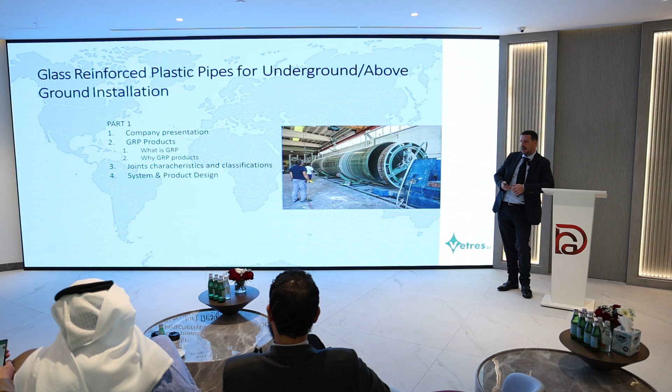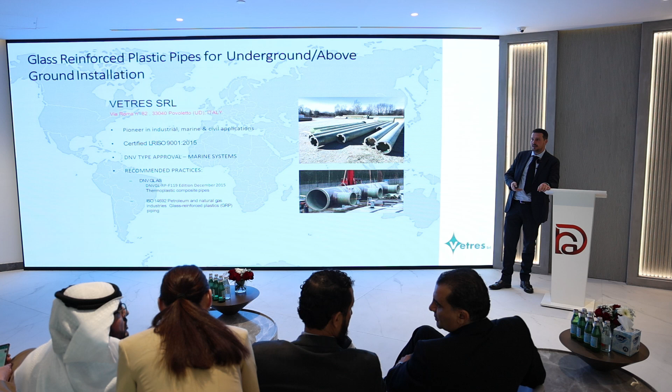We supply in the Middle East a lot of our materials, especially also with Dream Gulf. We supply to Metito. We have orders ongoing with Metito for desalination plants. We made with them the Burullus plant with Orascom.

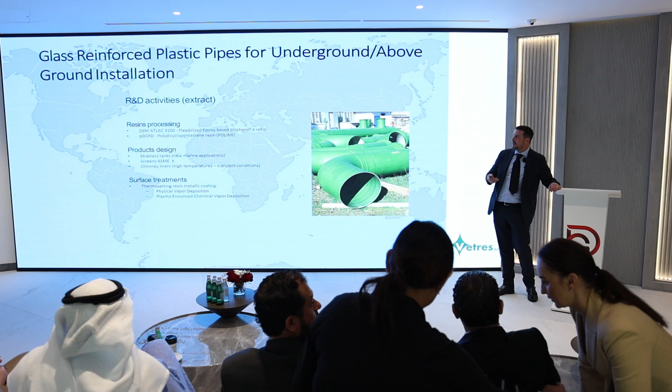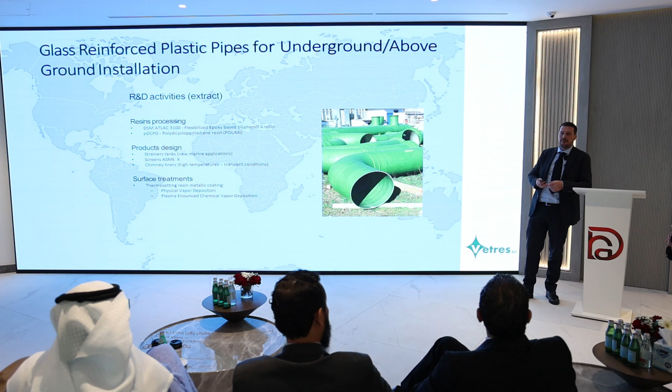We use different types of resin, depending on the request of the customer based on the liquid that goes through the pipes or the tank. So we can use resin for water, like isophthalic resin, or resin for chemicals, which is vinyl ester resin, and we can also use epoxy resin, which is more common in the Middle East.

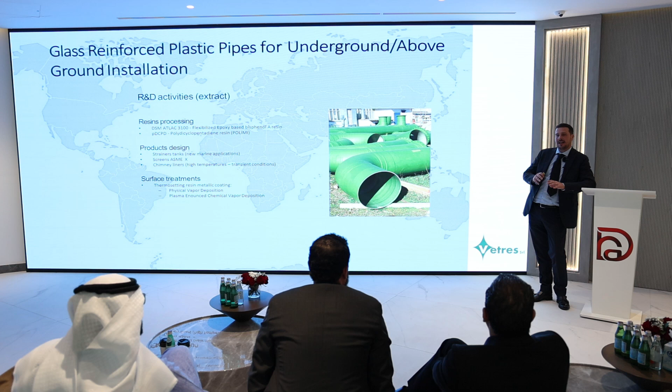We have everything inside our company, so the design is made by us inside the company. We have degree engineers who can develop the requests of customers, as with GRP, a lot of engineering companies, also big contractors, do not have much experience or knowledge of this kind of material.

So big companies were asking also for GRP companies who can help them with engineering. Sometimes we also hold workshops inside the big customer's facility to understand how to use GRP or where to use GRP.

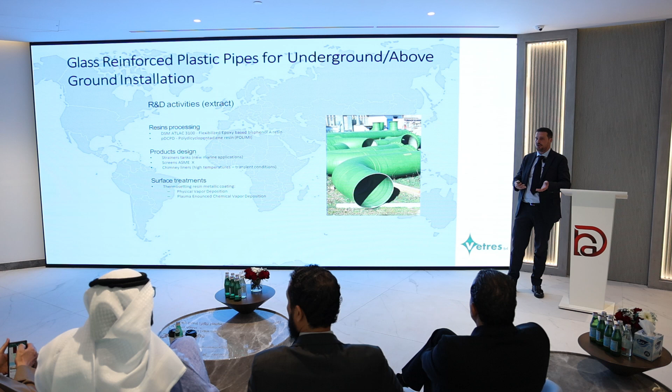This is the kind of product that we can supply. Our must is the bell and spigot joints.

With the bell and spigot joints, manpower specialized to make welding is not needed, because it's just a matter of inserting a male into a female with a double O-ring and a K-lock. Usually with GRP, the worst thing, let me say, is the welding on site, because you need specialized manpower.

Maybe you need to move chemicals from our factory to the other part of the works. But in this case, we solve this situation with these joints, which are mechanical joints. It's just a matter of inserting a male into a female, so it's a much easier and quicker thing.

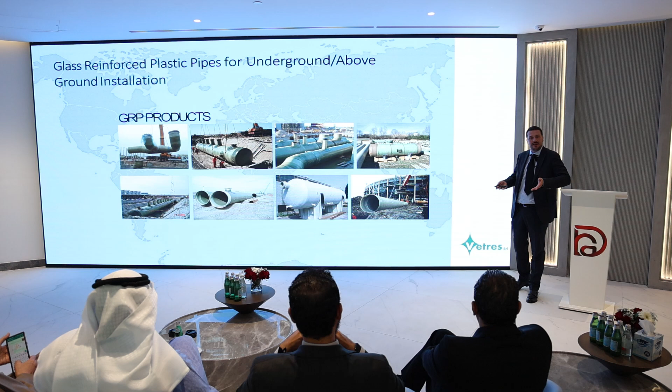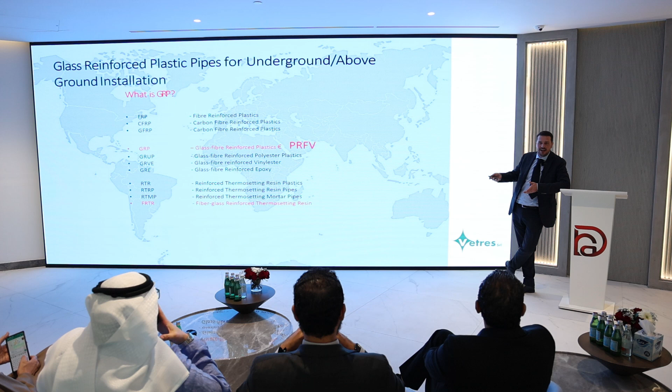GRP can have a lot of names and acronyms, but at the end it's the same material. Usually in North Europe it's called FRP, fiber reinforced plastic. Usually in the Middle East it's called GRP or GRE, but at the end it's the same product.

GRP is a composite material that can reach today mid to high temperatures, because before, GRP was used just for ambient temperature or a maximum of 60, 70, 80 degrees. Now with new resins on the market, we can reach also up to 140 degrees.

The most important thing is the HDT of the resin, which means the heat distortion temperature of the resin. Now on the market there are resins with an HDT of 180 degrees, so that means we can reach 140 with this kind of resin.

Usually the most common resins used are vinyl ester, epoxy, and isophthalic resin, as I mentioned before. Isophthalic resin is suitable up to 50-60 degrees. Vinyl ester resin is suitable up to 80-90 degrees. And then there is epoxy Novolac resin that can resist up to 140 degrees.

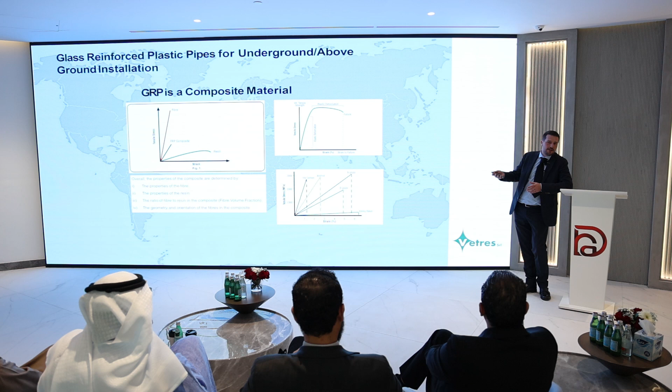Also, now GRP with glass reaches very good mechanical properties, because now between GRP and carbon steel, the difference in mechanical properties is not so large. We are very close to carbon steel, to metallic materials, let me say.

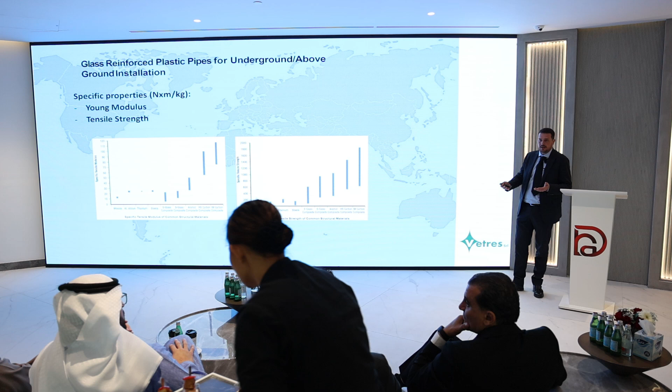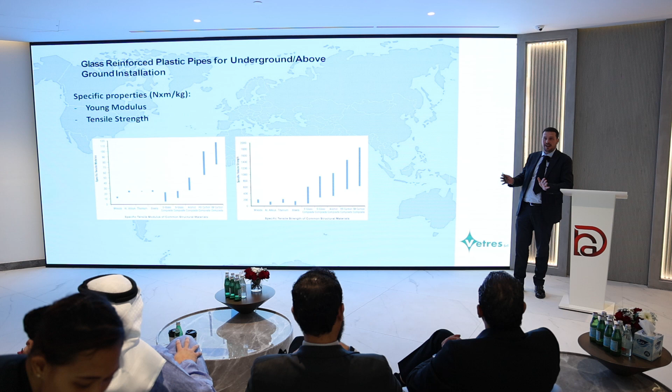Also, the advantage of GRP is the weight, because the weight of GRP is a quarter of carbon steel. So we can give our customers the possibility to save a lot of money in terms of lifting equipment on site, because you don't need big cranes or big lifting equipment, as the material is not so heavy. But you can maintain the same characteristics as carbon steel without losing any mechanical properties.

The GRP products are the best solution for corrosion allowance, because you don't need extra thickness on the GRP for corrosion. In metallic materials, before the pressure, you have to choose the thickness for the corrosion allowance. On the GRP this is not needed, because if the GRP resists, there will be no corrosion in this kind of material. Also, the GRP does not suffer cathodic underground issues, so cathodic protection with GRP is not needed.

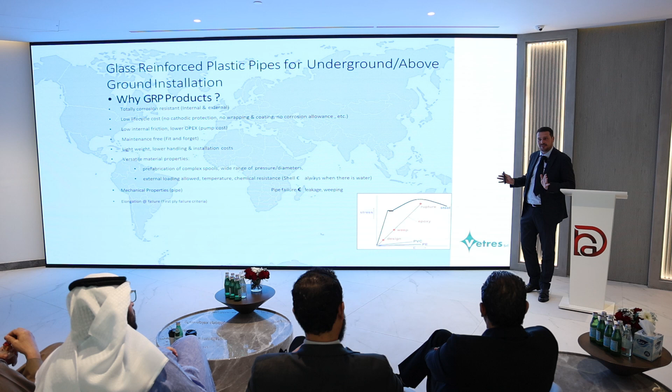So all this advantage with this material can be, at the end, if you give a look at 360 degrees, an advantage in terms of money and efficiency, because GRP is designed to resist 40 years. If you install the GRP in a proper way, as the DEP of Shell, our most important norm to produce the GRP, sets that if the company designs, constructs, and supervises the installation, the GRP can resist 40 years, and you can forget about this material underground or above ground.

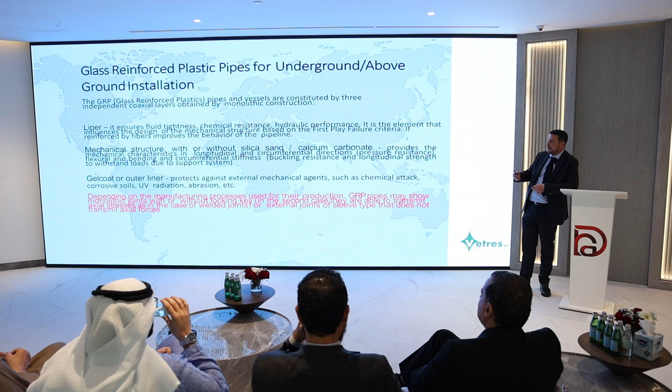The GRP pipes or storage tanks are built in three layers, let me say. There is the liner, that is the corrosion barrier. Then there is the mechanical structure and the external liner to protect against UV radiation, abrasion, and chemical attacks for the above ground application.

As I told you before, our must is the bell and spigot joints, as no manpower specialized in GRP welding is needed. But there are also other types of jointing; usually the bell and spigot is for underground and for very long line applications. For the heart of the plant or for above ground application, there are also the butt and wrap welding or the conical gluing joints. These need specialized manpower who know how to do it, otherwise it will be a mess.

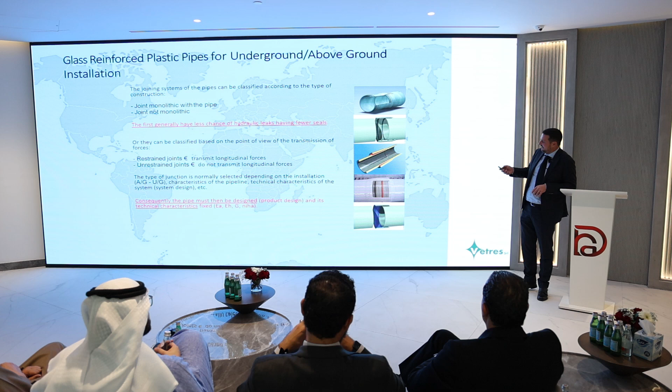Okay, so the GRP can be designed on specific request of the customer, customized on specific customer request. What we need to design the GRP properly for the application that the customer needs is to have at least some information, like the DN, the pressure class, if it is above ground or underground, the jointing system, the fluid to choose the correct resin, and the design temperature. These are, let me say, the minimum data that we need to design the materials in a proper way.

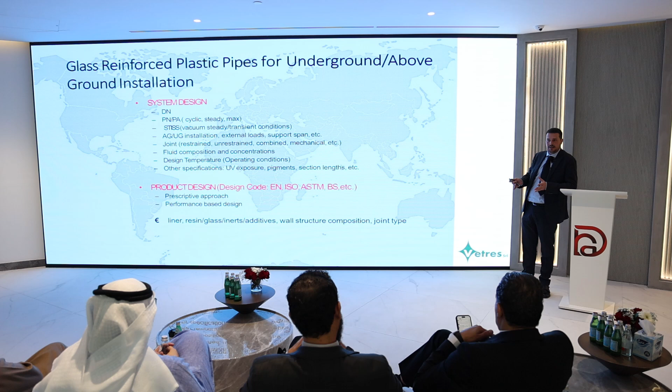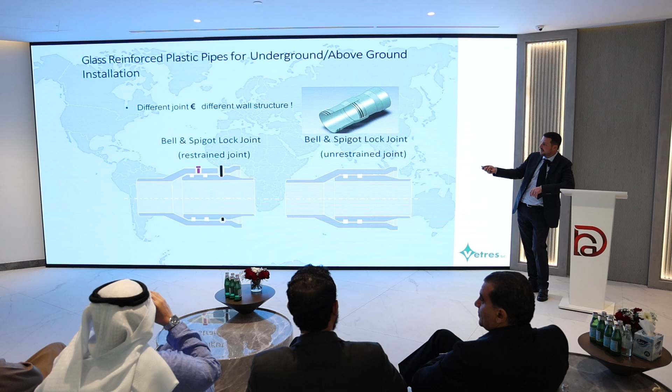Okay, this is the joint that I already spoke about before. There are two types of bell-spigot joints: the restrained joints, meaning the pipes cannot come out because there are anti-loosening devices. So in case of pressure, the pipe will not come out due to this anti-loosening device. Or for lines without pressure, like sewage, PN gravity, the anti-loosening device is not requested because usually there are anchor blocks along the line. These are the two main joints that we sell in our company.

Okay, this one is for above or underground installation. Our machines - we have 8 filament winding machines in our company to reach up to 4 meter diameters. We have the discontinuous filament winding system, meaning we cross the glass fiber at a precise angle. This is to maintain the same resistance horizontally and vertically, so circumferential and axial pressure is guaranteed.

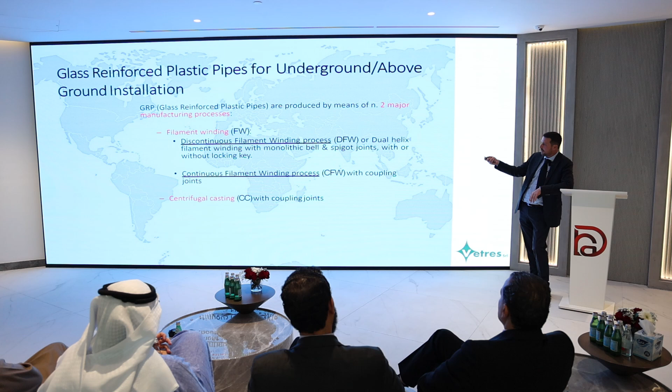There are also other types of construction of GRP piping, but we are not in this market. There's the continuous filament winding process and the centrifugal casting. These two methods are for non-pressure pipes or minimum pressure pipes, and are usually used just for sewage, not for very big industrial applications like the discontinuous filament winding process.

This is our machine in the factory, the glass fiber. We buy only raw materials of first class, from Europe or the United States of America. So all customers can be on the safe side with us that all the raw materials will be first class materials. So we have these glasses, usually coming from OCV, a very big important company in France, the old Saint-Gobain, and the resin usually coming from Spain, from Ineos. We use Ineos resin, Derakane resin, that are the best resins on the market.

And you make the layers on the pipes with this cross filament winding. You have the yarn of glass that passes in a bath impregnated with the resin, and then at a precise angle it goes in a helical way onto the molds until the thickness requested by the program, by the application, and then we extract the pipes from the molds.

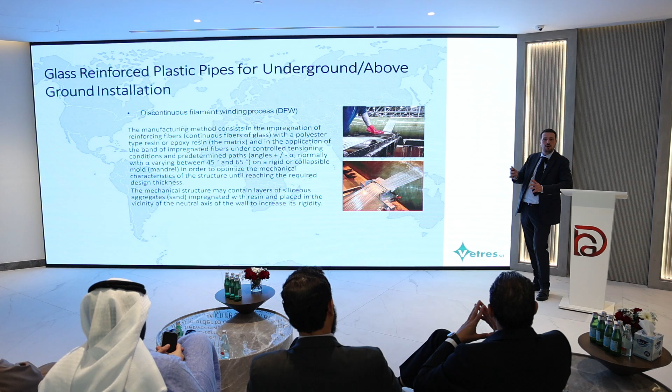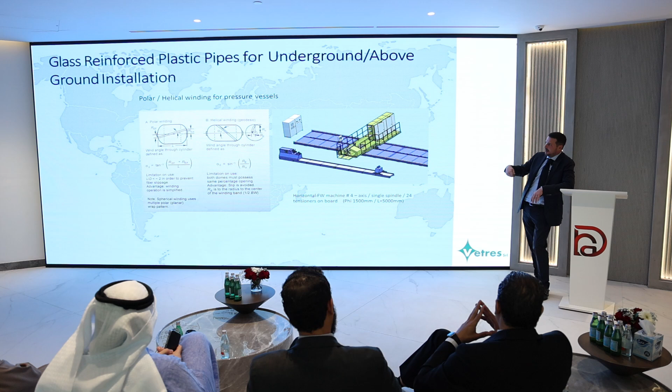This is the machine, as I told you. We have the glass, and then the glass will be on the molds impregnated with the resin. This is a picture just to show you.

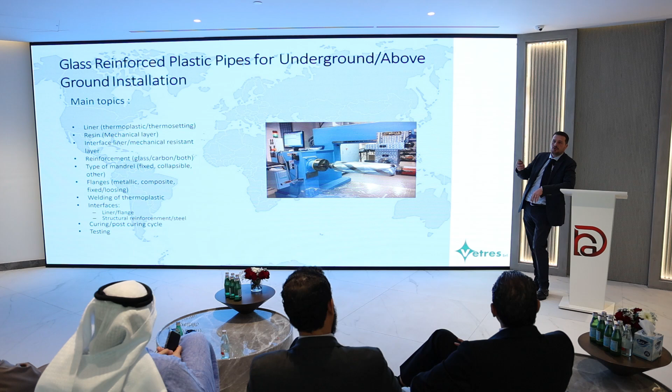Also, we made storage tanks. We start from 1 cubic meter to 200 cubic meters. So we made also a very big vessel, 4 meters diameter for 18 meters height. So, very big ones.

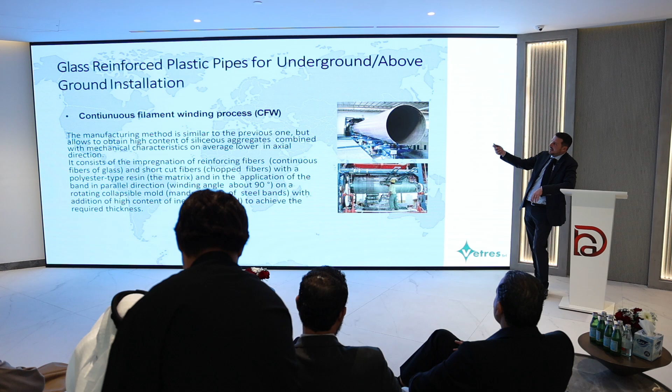These are the other two processes that I spoke before that we are not producing, just to give you a different overview of the products. These pipes will be,

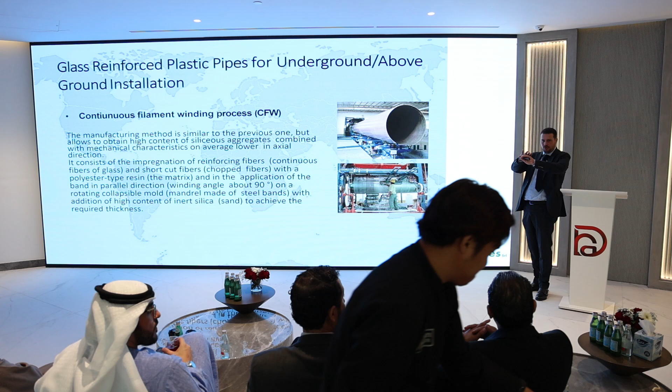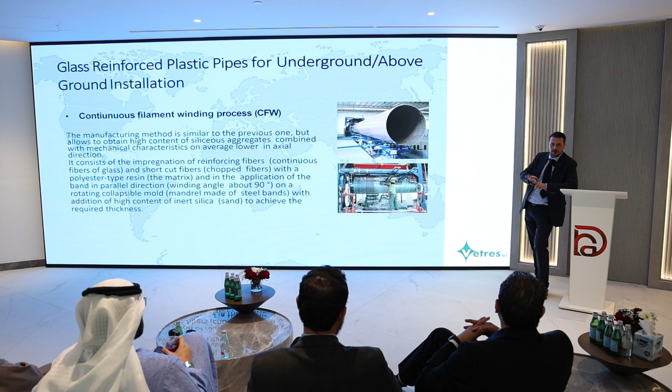how can I say, made in parallel, so 90 degrees, no cross filament winding, just parallel. This pipe is made continuously, and then you cut it. The parallel angle does not give you good mechanical results for the stress of the pipes.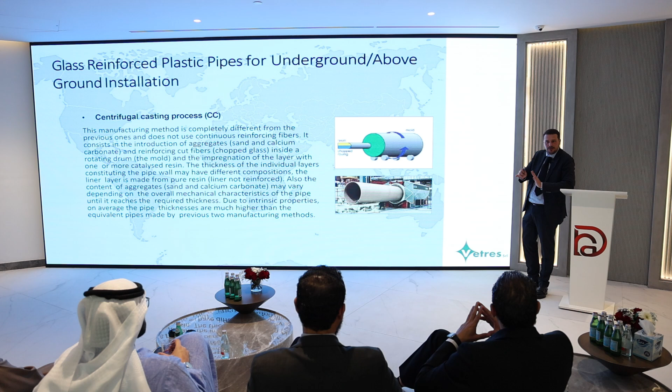And the centrifugal casting is even worse, because you cut the glasses and put them in a mold, and then the mold turns with resin, and the pipes come out. This one has cut fiber, so the mechanical properties are not there. It's just for PN1 pipes.

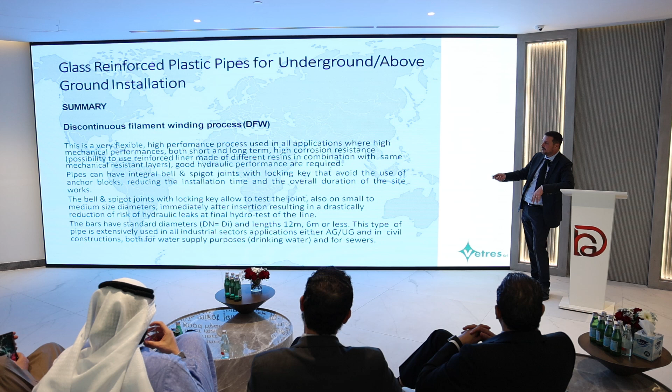At the end, the discontinuous filament process is the best process to make GRP pipes, because it can guarantee pressure resistance, and is foreseen for a 40 year design lifetime. The continuous process, as I told you, is just for applications with no pressure. So the conclusion is that continuous filament winding pipes are for non-pressure, while these are for pressure pipes.

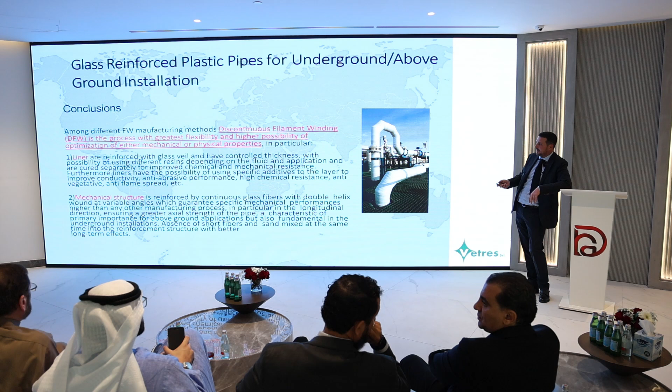So the liner is reinforced with glass, with controlled thickness. We have the possibility of using different resins depending on the fluid and application, and they are cured separately for improved chemical and mechanical resistance. The mechanical structure is there to guarantee the pressure class, the mechanical properties, and then you have the external layer to protect against atmospheric agents.

The GRP pipes can be installed underground or above ground. Our market is very open, because we can supply this material to a lot of types of industries. For example, this one is a main header for a cooling tower. We work a lot with Babcock, in the cooling tower field, through Spig, which is an Italian company.

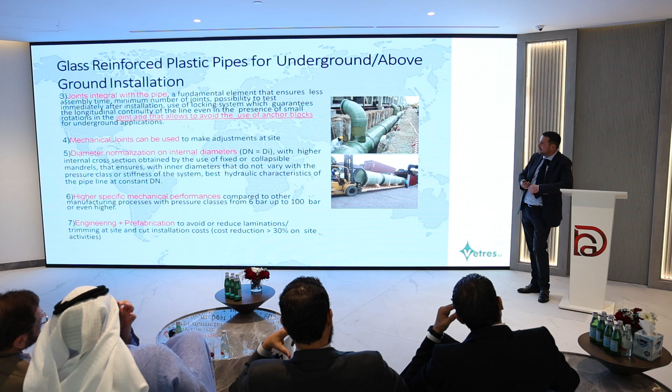We work with Hamon to make this kind of main header. Also, we work a lot in the underground field with water, for sure cooling water in the plant, public network water, and also irrigation can be used.

Usually the GRP pipes can be made to the exact purpose of the customer, meaning we can make a prefabricated spool in our factory for the special pieces to connect our piping. Everything can be designed by us to help the customer as much as possible. And in the field, you receive the special pieces already with the joints.

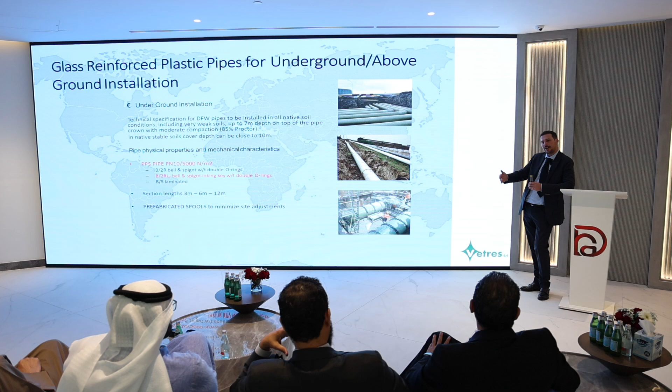So again, no specialized manpower needed. We can make it like a Meccano. If you have the beginning of the line and the end of the line, the precise road, the precise way of the piping, we can design how to make the line without any adjustment. We can be very precise on that.

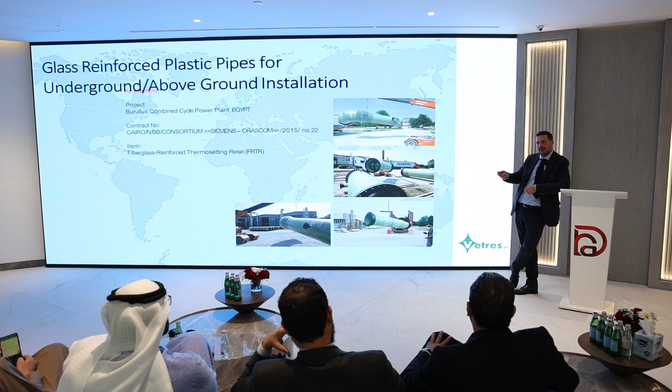Orascom gave us the line, and we studied the line, and we made the pieces to connect, flanged, or with bell and spigot joints, without any welding on site, just mechanical joints. This is our main customer, let me say.

We work in Italy with Danieli, Saipem, that is Eni, which is the most important company, but we also work in the chemical industry with BorsodChem in Hungary. For example, we work with Solvay, we work with Shell, Technip, Tecnimont. Versteden is our partner in North Europe, in Holland, to work with Shell.

We work also in the marine division, because we are also a supplier of Fincantieri. For Fincantieri, we made a turnkey project from design to installation for cruise ships, Costa Cruises, Aida Cruises, and we work also for MSC Cruise.